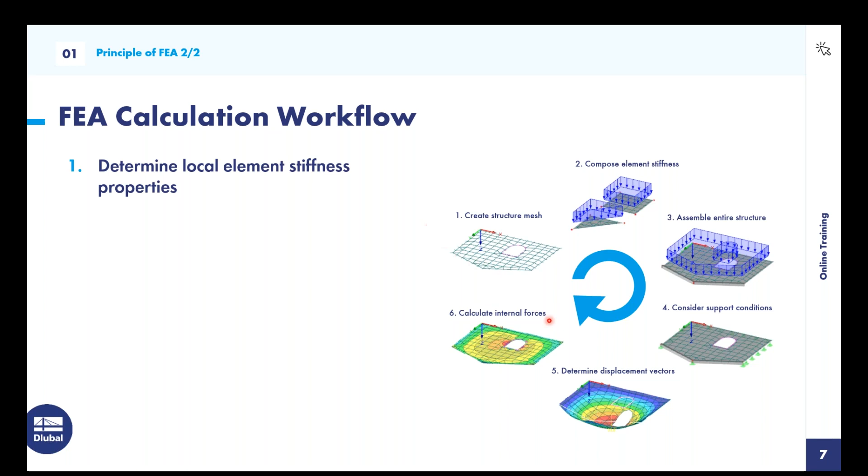Then in the second step, the program changes the stiffness properties at each node to the global coordinate system, so element stiffness is composed. Then in the third step, the composition of the entire structure takes place.

The fourth step is where boundary conditions and supports are defined. These, for example, could consist of sliding, rigid, or hinge supports.

And then the fifth step, the displacement vectors can be determined by solving the system of equations. And lastly, the support forces and internal forces can be determined just like I mentioned with the displacement method.

So now let's do an example to go over. This example, like I talked about, is going to be the continuous plate example. We're going to model this example and compare results of the bending moment with the continuous beam with our plates here. We'll go over FE mesh design, convergence behavior, FE mesh size, and result interpretation, including distribution of internal forces, shear stiffness, and result smoothing.

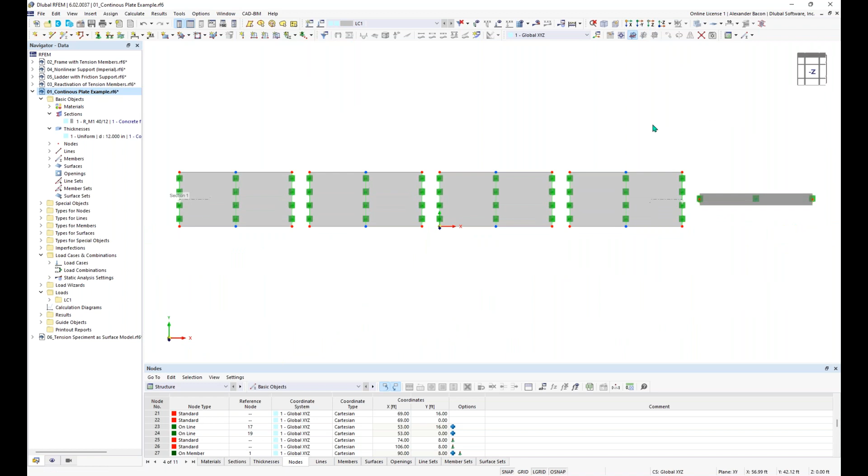You can change the view of the model in the toolbar up here using these buttons to manipulate the view. There's also a default isometric view. You can change the rendering here from wire frame model to solid model to transparent model.

Next, we have the display tab down here at the bottom. Under the display tab, you can turn on or off the graphical rendering of objects and other settings. Turning off the render of something just turns off the rendering, but it will still be considered within the calculation even though you can't see it in the work window.

The next tab is the Views tab down here in the panel. We can activate visibilities, for example, and you can see I have members and cross sections of just this type checked on. So now anything with this cross section will be shown, and anything else will disappear in the background.

You can also create user-defined views. So let's say I want this to be a view that I want to see a lot, I can click on this button and just name it something random. Now if I want to see this custom view, I can simply click on the button here, and I'll see that view pretty easily.

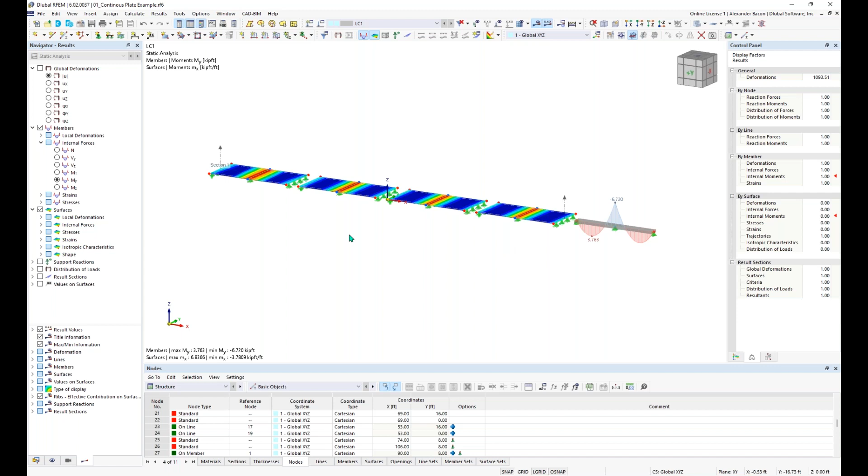One other thing I wanted to mention before we move on is highlighting. If you drag from left to right, anything within the box that's engulfed in the box will be selected. If you drag from right to left, anything touching the box will be selected. So that is how highlighting works.

And with that said, that's an overview of RFEM 6. Now we can move on to creating our continuous plate.

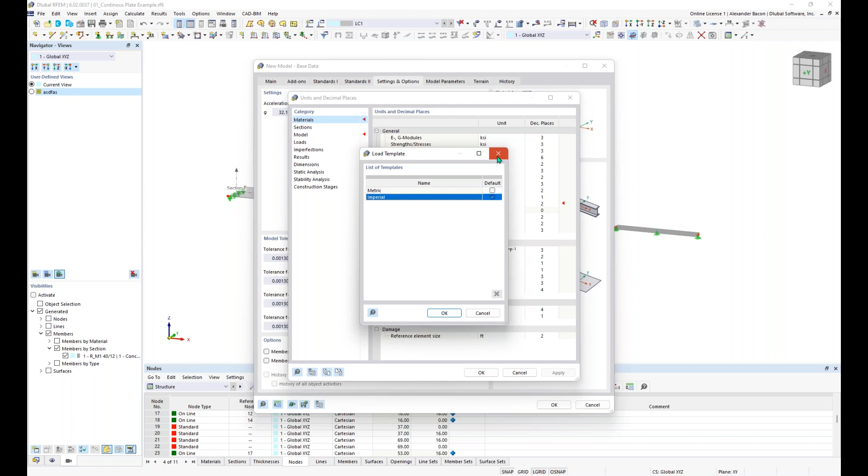Also to mention, I'm going to be using imperial units throughout this training. You can change between or switch between imperial and metric units by going down here to this button and clicking on units and decimal places. Then you can go down here to load, save template, and change the default units you have set, and change between units as well here. So like I said, I'm going to keep mine in imperial units, click OK, and then this should open up a blank model.

So now we can edit the grid points and units. First you'll see in the blank model that our grid has been created here - it's a blank grid, and we have our grid points here. Right now, by default, if I go up here to the work plane, grids/snap settings button and click on this, you can see I have mine set to a default of 50 by 50 grid points with a spacing of 1 foot by 1 foot.

What we want to do is change this to 100 grid points by 100 grid points, each in the negative and positive direction. So you can enter those in. I have also created - you can save templates.

So I saved this as a template, and we can go to load template. You can see I saved this as a template called student training, and you can set different templates as the default if you're using the same settings over and over again. So if I click OK, you can see that my template was loaded in, and I have 100 grid points by 100 grid points with a spacing of 1 foot by 1 foot.

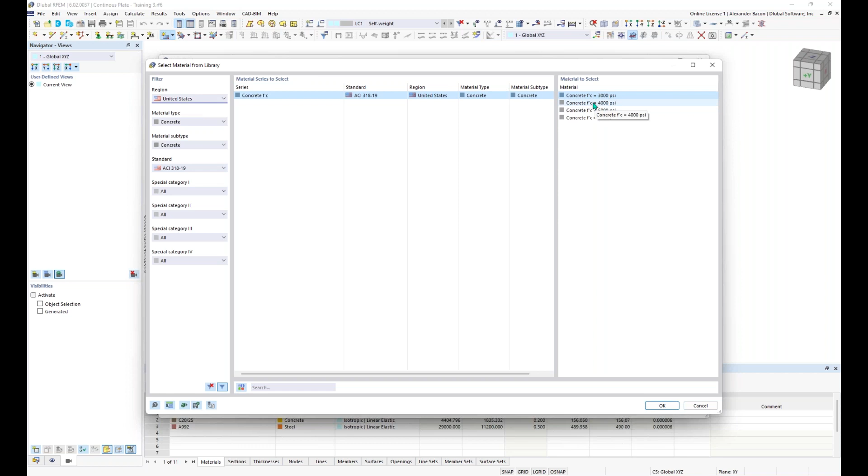So I'm going to click on this button here to import a material in from the material library. I filter to the United States, concrete, and ACI 318-19. I'm going to choose concrete with a compression strength of 4,000 psi, click OK. And now I just need to enter in a thickness, and that's going to be 12 inches.

Also, we can edit our material. So I'm going to click the edit material of the thickness button here.

And then I'm going to choose to create this or set this material to user-defined materials so that we can edit our basic material properties here on the right hand.

I'm going to change the Poisson's ratio from 0.2 to just 0, and this will allow us to get equal distribution of results across our surface. Normally you wouldn't do this, but I'm just going to do this for example purposes today, and click OK.

And now I have my material and thickness set, so I can click OK. Now you can see those are set here. So now I'm going to click OK, and you can see my cursor has changed to this reticle.

I just need to give the program 2 points on where this rectangular surface is going to be. The first point is going to be at the origin, and then the second point is going to be at 32 feet in the X direction and 16 feet in the Y direction. Click OK or left click.

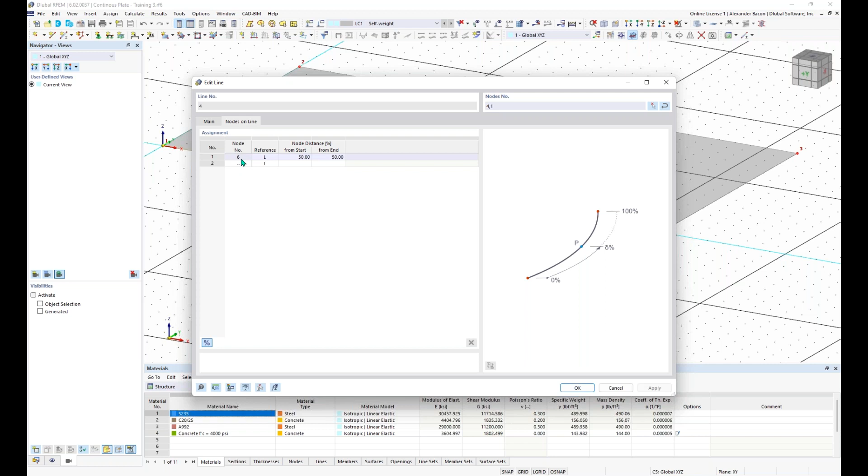So you don't have to worry about this, but in the background, that's what RFEM's doing, and that's the reason why this node here is blue, and this node here is red because it's a standard node just defining the line itself. So good thing to keep in mind.

So now what we want to do is edit this line over here. We can double click on it to edit it, and then under editing the line, we want to add some supports to this line. So we can click on support.

Under the support tab, we can go down to the drop down here and choose this default or predefined support. That's a hinge support, click on it, and then click OK. And now you can see that our line here now has our hinged line supports on it.

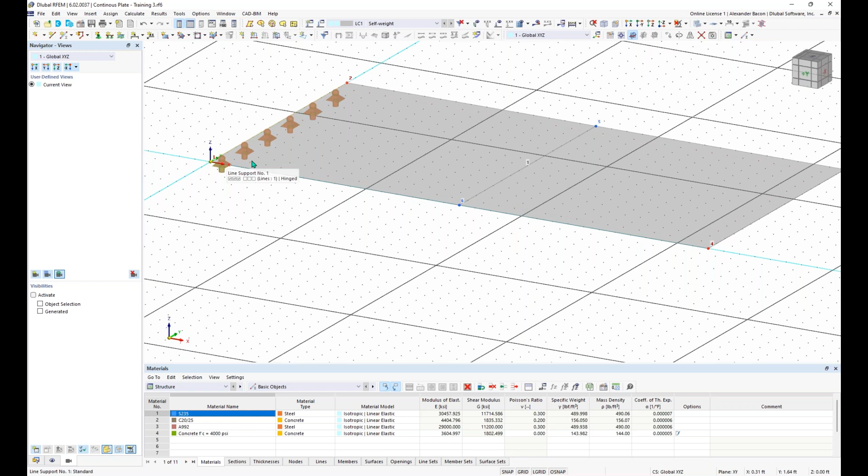So what this means is that this support will support translational degrees of freedom in each of the 3 directions, but the rotation is released for rotation about each of these axes.

So now we want to add some support to our midspan here. What we can do is highlight just our line here. We also want to add support to our other side here, so I can hold Control and also highlight that line. And then we can go up here to the toolbar and hit Assign Line Support.

Instead of just using the predefined support, we can also click on Create New Line Support. RFEM will remember the selection of the lines that we selected before going into the tool, which you can see here in the graphic.

And for this, we want to choose the sliding in the X direction, so you can see it unlocks the X translational degree of freedom and then locks the rotation about the Z axis. You can also see the symbol for the support has changed. If we click OK, and then click OK again, you'll see those supports have been added.

And you can also see, when clicking on elements, what elements they're tied to. So you can see our support is tied to line number 3, which is defined by nodes 3 and 4. So it's easy to see how objects are connected within RFEM if you need to know that.

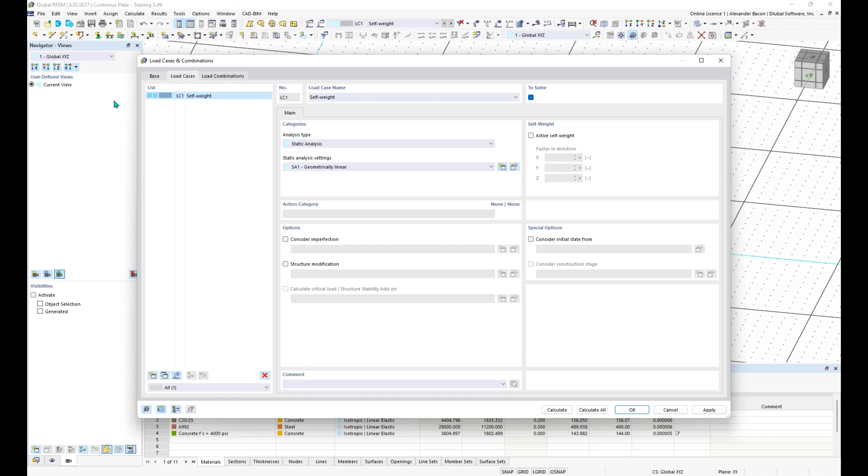You can see that we have self-weight activated for this load case. I'm just going to turn self-weight off. We only need to worry about one load case, which is good.

We're going to be adding some loading to this plate now, and every loading requires a load case to be assigned with it. So now that we have our load case created, we want to go up here to the tool new surface load.

Clicking on that, you'll see this dialog box will pop up. Here we can set our load type to force and then uniform, and we can set our load direction to global and the Z axes on true area. Then the load magnitude will be set to negative.

0.21, which is 210 pounds per square foot. We can click OK, and now all we need to do is choose our surface graphically. Now we have our load here graphically placed onto our slab.

You can also right click on this load and decrease the size of it graphically if you'd like to. So now we have our loading.

We also want to now get into FE mesh refinement. I'll keep my loading on, but we can go up here to this button and click on the dropdown and take a look at the mesh settings. Here you can see by default the mesh that will be generated is 1 foot. The finite elements are 1 foot by 1 foot. So if nothing changes, this is what we're going to generate.

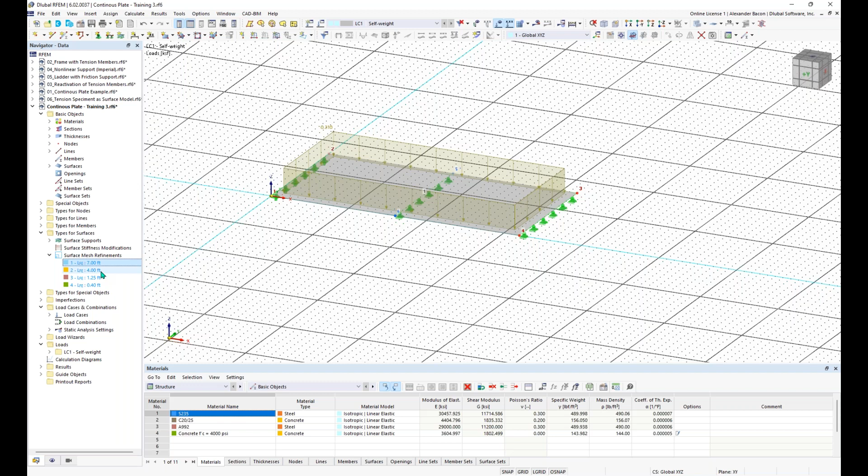So now if I click OK and expand my surface mesh refinements, we can see that we created them, but they're this light blue color because they're not assigned to any surface. We'll just leave this as is for now. What we want to do next is make some copies of our surface here.

I'm just going to highlight the whole thing with the loading and everything and go up here to the tool move/copy selected objects. I'm going to create a copy, and I want to make 3 copies in the X direction, and I want each of these copies to be displaced by a vector of 37 feet. Now with this set, I can click OK.

You can see now I have 3 copies of my plates. What I want to do is take this and just move it over so it's more centered in my grid. And now we have our 4 plates.

So now with our 4 plates, we want to create a new single member.

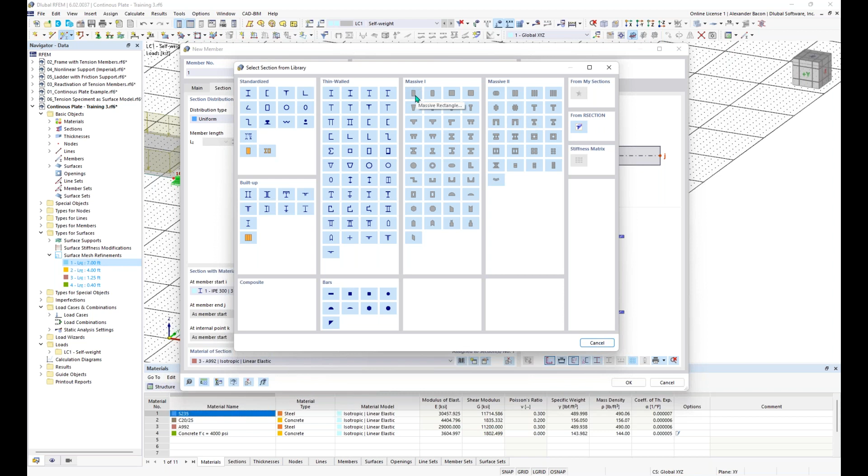Under this dialog box, we have some settings for our cross section. We want to set the material. You can see I have a couple materials already predefined here, but if you need to, you can use the material library to import new materials in. I would want to choose concrete 4000 psi, for example, just to simulate our plates.

Then under the parametric massive tab here, we would want to choose a depth of 12 inches and a base of 20 inches here. This is going to simulate the same thickness as our plates.

Then under the main tab, we can leave all of this set the same. Click OK, and now you can see our section appears here. You can also click on this button to display section details and view your section properties here if you'd like. So now with all of that defined, we can click OK.

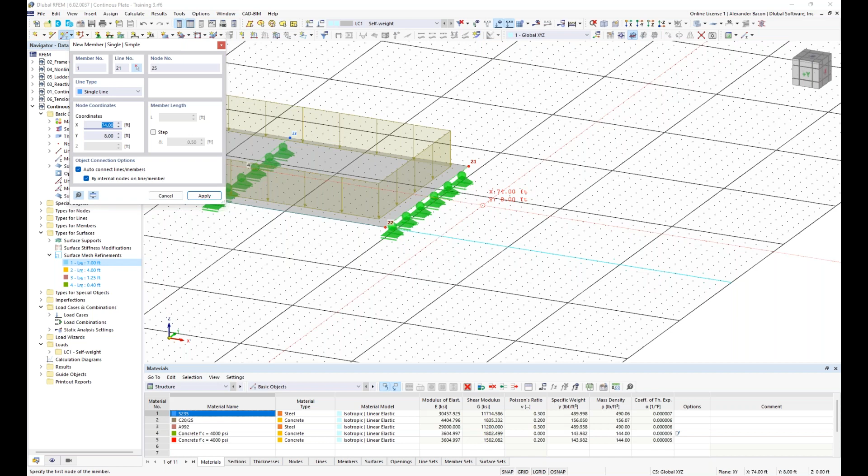Now I just want to snap to my grid points and draw this section 5 feet away from my plates. So I'm going to snap to this grid point, and then I can either just draw out the length of my section, or keep my mouse going in the direction I would like the member to go. Then on my keyboard, I can type in the distance 32 feet, which you'll see change in the dialog box on the left. If I hit enter and then right click, I can exit out of the tool, and you can see my beam here has been drawn out.

So now we need to add some supports to this beam. I'm going to turn off the showing of my grid. You can see we have some buttons down here at the bottom, and I'm going to turn off the grid here.

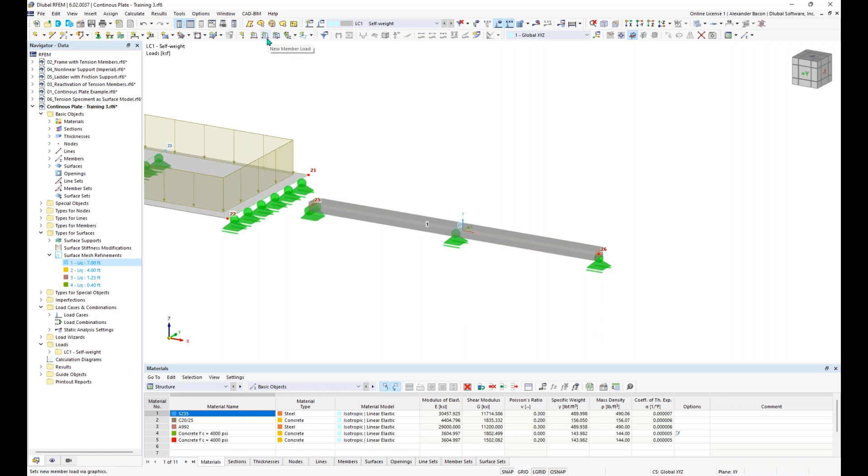Now we need to add some loading to this member. We want to use the tool new member load. There's also new line load, and a good rule of thumb is line loads are only applied to lines, like boundary lines surrounding or defining a surface, while member loads should be applied to members. So we're going to choose member load, and this load will be in the negative direction, just like the surface load, at 210 pounds per foot, or 0.21 kip per foot.

So we're going to have a force, uniform in the z direction. We click OK, graphically select our member, click OK again, and now we have our loading assigned to our member. So now all of our elements here are loaded and supported.

I can go up here to the show loads button and turn this off. Now we need to add in our surface mesh refinements, which we didn't define yet, so I'm going to do that now. We can right click on one of them and go to edit, or click on assign to surfaces graphically. I'll click that and assign my 7-foot refinement to the first surface here.

Then I'm going to right click on 4 feet and assign that to my second surface, assign the third refinement to the third surface, and then assign my fourth refinement to my fourth surface.

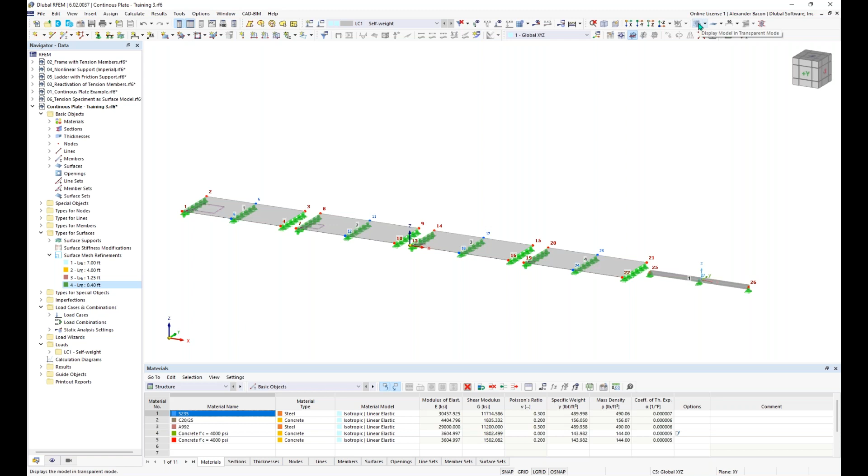Now I'm going to change the model to a wireframe view by clicking the rendering button up here, and then generate the FE mesh by going to this button, hitting the drop down, and hitting generate FE mesh. Normally this is done before the calculation is run, so you don't have to worry about it, but for example purposes I wanted to show you what the FE mesh for each of these surfaces looks like now.

Focusing on this first surface, that was our 7-foot FE mesh refinement, you can see the quality of this one is really bad, so definitely expect inaccurate results when it comes to the quality of this one.

You can see how it gets better as we move on to the second surface here, and better, and then our fourth surface here looks the best, so I would expect extremely accurate results from this one. That's what our FE mesh looks like right now for our surfaces.

Now we want to add in a results section to our surfaces, so I'm going to click on the results sections button up here. You can see here we have our results section. The main thing we need to do is tell the program what the first and second point are, the projection direction, which will be the global z direction, and then we want to show the section in the local positive z direction, which you can see what it will look like on our surface here.

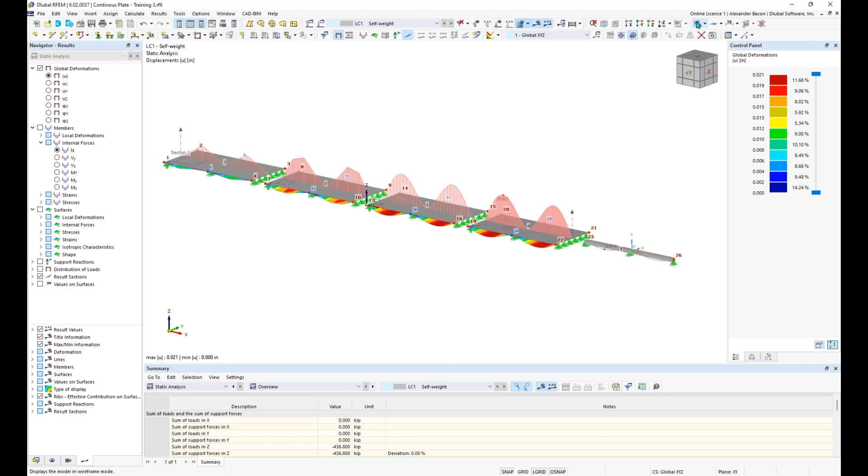So now let's calculate the results. All I need to do is go up here to calculate all results, this button here which looks like a little abacus, and then all of the results will be run. You can see right now our fourth tab here in the results has been added.

And we are now looking at the global deformations. I always recommend checking the global deformations first, because you can always tell if something is wrong with the modeling if your global deformations look strange. You can see our deformations look pretty normal, they all look good, so that's good. Nothing was modeled incorrectly — a good visible check.

I'm going to deactivate the results, our result sections, so we can turn off the result sections if we want by unchecking this box here in the navigator.

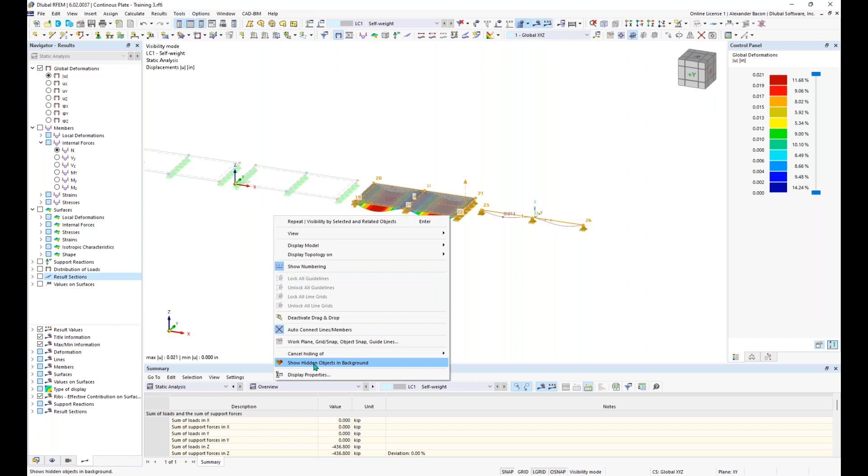We can also take a look at the internal forces. Let's highlight our last surface here and our beam, then go up to this button, hit the drop down, and choose visibility by selected objects. Any object that wasn't selected gets grayed out. I can even right click and turn off show hidden objects in the background.

Now we have an even cleaner look. We can turn on internal forces of our member here, which will turn off global deformations. Then we turn on results for members, and under internal forces, obviously we're not going to have any axial forces since we just have a beam here. So we want to look at the moments.

You can see I chose My, which is the moment about the local y-axis. If you right click on the member, you can turn on the local axis system of members and see what that looks like. So these are the moments about our local y-axis - I'm not sure if I said x, I meant y.

We can also take a look at the results on our surface. What I'm about to show you is pretty important. To see the results on the surface as well, that's a little different - we can just check on the box for surfaces here.

Then under internal forces, similar to the member, we go down to internal forces. If we wanted to compare results between the two, we'd want to turn on or show the moments along the x-axis. These are the moments in the surface along the x-axis, and this is comparable to the moments about the y-axis for the member. That's how we can look at the internal forces.

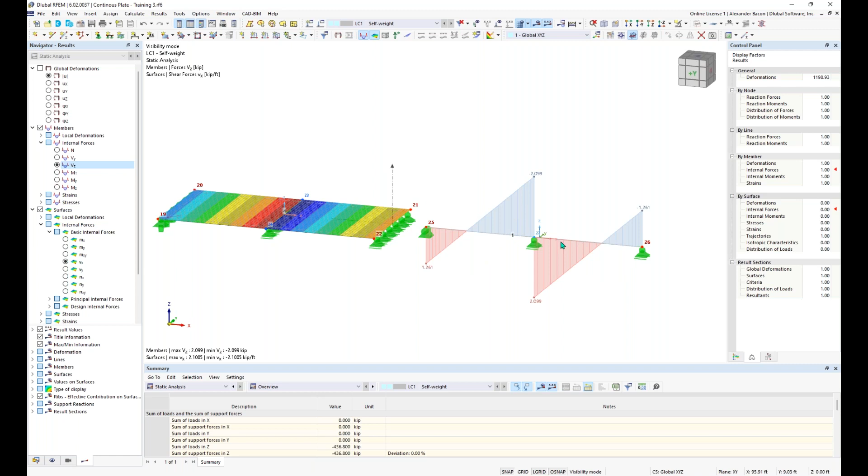And then we could turn on the shear VZ, which is in the local Z direction for the shear of our member here. That's how we could compare the two.

Now let's clear our results, clear our visibility. I'm going to go up here to this button and cancel this visibility mode, and that'll bring back the rest of our surfaces.

Now what we want to do is activate the results sections. Let me zoom out here. We want to turn on our results sections again, and now you can see a better comparison between those two. We also want to turn on the local extremes for our results sections, which is under the values, under the results sections down here.

This separate panel down here is for changing how the results look graphically. If we go into results sections, I could turn on local extremes here, and now we can see the values of the local extremes of each of our elements.

Now if we take a closer look at something like bending moments, we can see how the results compare between the beam here and our plate here. Obviously the surfaces should match the beam, and this shows how important it is to make sure your FE mesh is fine enough, because you can see the superfine FE mesh here is the closest comparison.

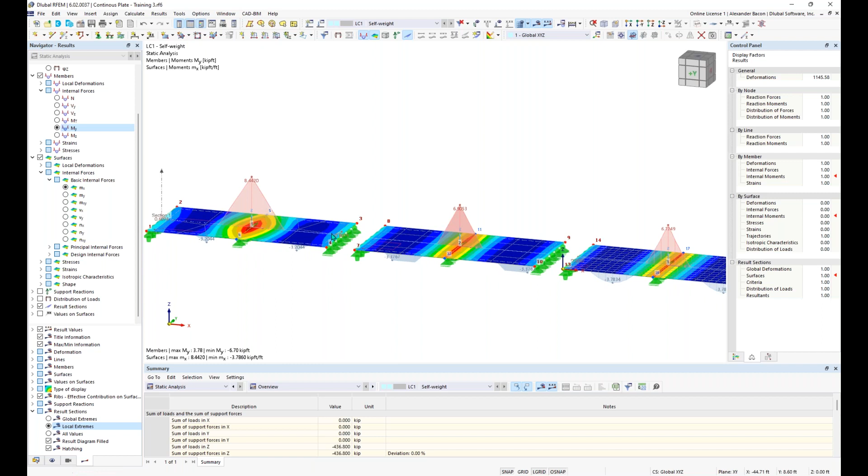So our maximum moment is 6.70 and 6.70. As we move down the line here and our FE mesh gets worse, our results start to stray further and further from our control of the beam. The finer the mesh gets, results are only being calculated at each FE mesh point or node on the surface, so the finer the mesh, the more points of data we have, and the more accurate results.

Keep in mind though, if your mesh is too fine, your calculation time will increase. So you want your mesh as fine as necessary, but as coarse as possible. I would recommend something like the third example here. A good rule of thumb is to have at least 4 FE mesh blocks between any given span or boundary, so this second surface here would be the minimum of what I'd recommend.

Next we can take a look at the result diagram of our section cut here, which is pretty interesting. We can get a better view of our result diagram starting from surface 1 all the way to surface 4. It's interesting to see how we have very little data points for the first surface, which looks very inaccurate, and how this gets smoother as our FE mesh starts to increase and looks a lot better.

Hi, Alex. Yeah, we just have one question. Okay. Can you show us how to create a user-defined material?

Okay, yeah, that's a good question. I can switch back to RFEM to show this. If you want to create a user-defined material, you can go to the data tab under the navigator, and then you can see here we have our materials, which are the ones we pulled from the material database. I can right click on the materials here and click on new material. Instead of importing a material from the material library, we can choose the option user-defined material, and then you can just enter in your material properties manually.

In RFEM, we can now talk about shear stiffness. When it comes to hand calculations, if you're trying to match the results of the beam here, you have to take into account shear stiffness effects. This is what RFEM does in the program, and it leads to increased deformations due to shear forces. This is not taken into consideration with hand calculations, where you assume a beam like this has infinite shear stiffness.

This plays a major role when it comes to a material like concrete as well. This is taken into account by default in RFEM, and you can deactivate it so your hand calculations match. If I wanted to deactivate shear stiffness for this beam, I could double click and edit the beam, then go under the section tab, edit the section, and under the options for the section, you can deactivate the shear stiffness. Checking that on, I'm going to click OK.

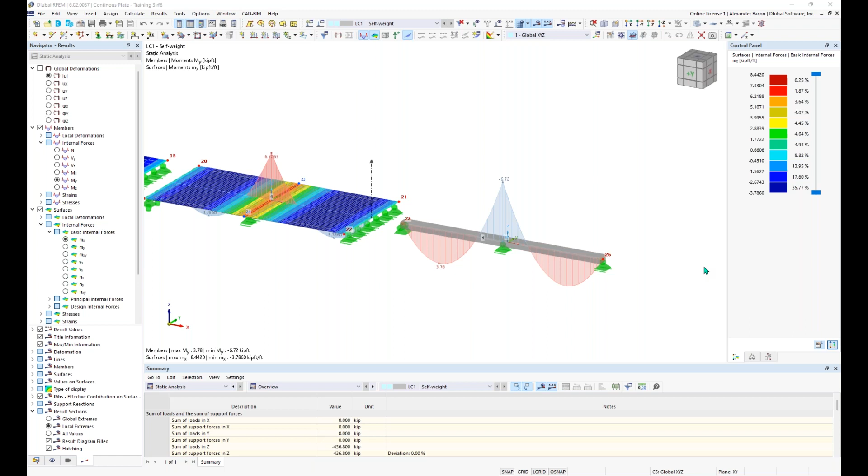Now I'd just like to give another test and see what everyone thinks. So this next test is going to come up now. I'm going to launch that and give you guys a little bit of time to answer it.

All right, so let's take a look at the results. The statement is: the FE mesh size should be. The first option is as fine as necessary and as coarse as possible, then as coarse as necessary and as fine as possible, and the last option is as precise as possible and as coarse as necessary.

This is a little bit of a brain teaser, but the first option is correct: as fine as necessary and as coarse as possible. The reason is you want it as fine as necessary, you don't want your mesh super small, because that'll increase your calculation time. So you want it as coarse as possible, so your calculation time isn't as long, but as fine as necessary so the results are accurate. So the first option was correct. I'm going to hide that.

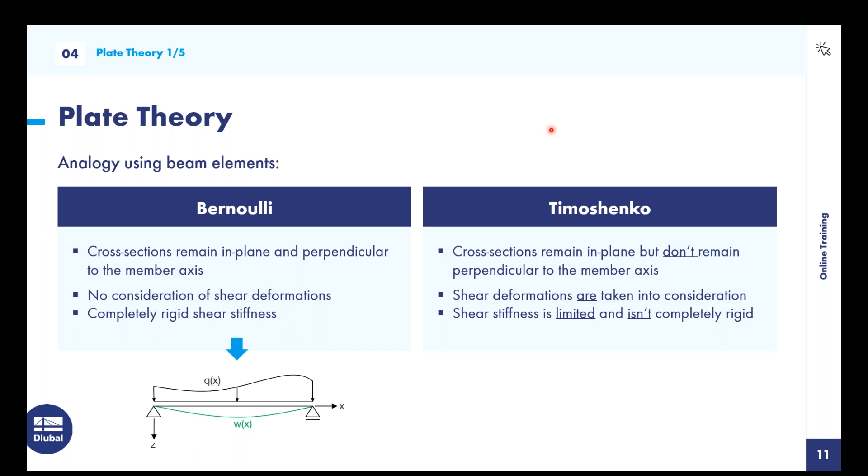And then the second theory is the Timoshenko theory. The assumptions with this one is that the cross sections remain in plane, but they don't remain perpendicular to the member axes. This means that shear deformations are taken into consideration and the shear stiffness is limited and isn't completely rigid. So the Timoshenko theory takes into consideration shear deformations where the Bernoulli's theory does not.

Now, how do these compare to the equivalents of the two plate theories for plate elements? Bernoulli's can be comparable to the Kirchhoff plate theory, and the assumptions for the Kirchhoff plate theory are that we assume we're going to be using a geometrically linear analysis, so small deformations. We're going to be using a linear elastic material basing off of Hooke's law. The cross-section remains flat, there's no warping, there's constant thickness, and there is no consideration of shear deformations.

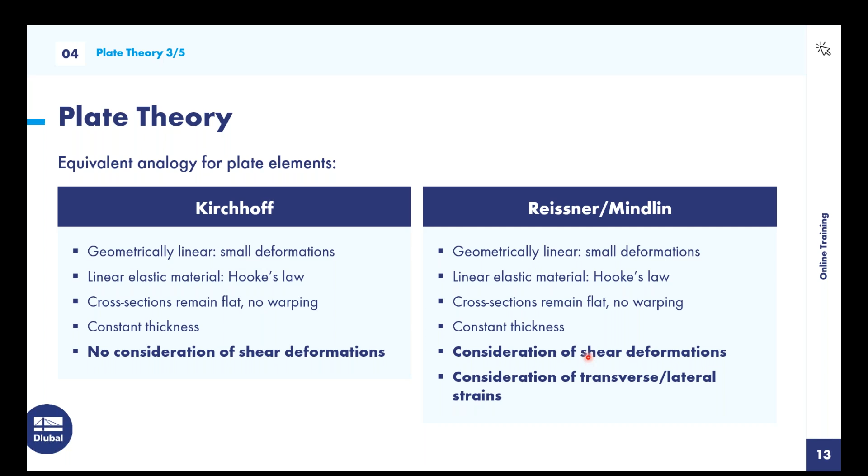Just to summarize, the Kirchhoff theory, when used with very thin plates, gives great results. This theory does not consider shear deformations. You also have to keep in mind that this only considers pure bending and load bearing capacity, and this is a very simplified approach.

Whereas with the Reissner-Mindlin theory, this theory is great for the use of thick and thin plates, and the reason for this is because we do consider shear deformations, and you have to take into consideration that the shear influence component is relatively high. If you're neglecting shear forces, you're going to have a significant error. This is a high value approach and increases the accuracy of your shear forces. So in my opinion, the Reissner-Mindlin theory is what you should be using all the time, but it's just good to know the difference between these two theories.

Now to relate this back to RFEM, we can look and see where these settings to choose between these two theories are located. We want to go under the navigator and under the data panel here, then under the static analysis settings, and go under the settings that we're using. So we'll edit the static analysis settings.

You can see we're using the geometrically linear analysis, which is for our load cases, and all load cases are calculated using a geometrically linear calculation by default. Then under the basic settings, you can see here we can change our bending theory from Mindlin to Kirchhoff if we want, and click OK. We should see a difference in our results.

So you can see now our results match more closely to our beam here. This is because both of these are now not taking into consideration shear deformations. Now we would have a bigger delta in our results if we were using a thicker plate, such as a foundation plate, and the shear forces and deformations are going to be changed as well.

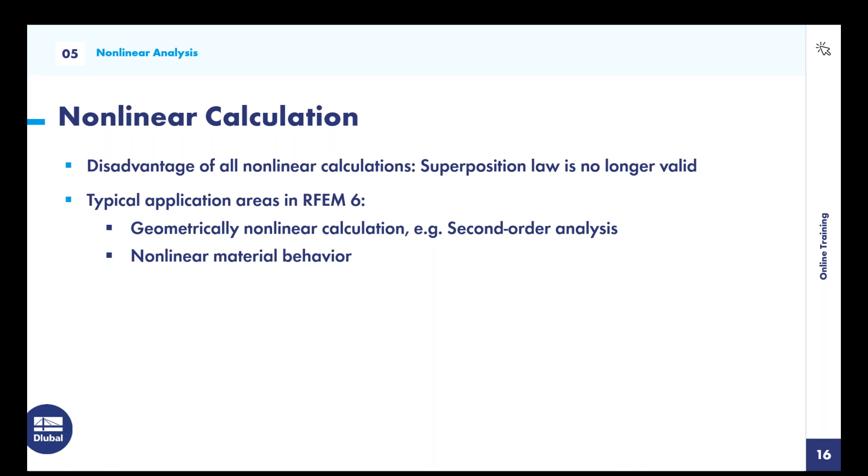We also have nonlinear behaviors for structural objects like members, hinges, and supports, for example. I'll be showing examples of all three of these areas in RFEM 6 after this. Also keep in mind that these types of calculations increase accuracy, so that's an advantage, but another disadvantage is that the calculation time can also increase when adding nonlinearities.

So now let's go back to RFEM and go through some examples. I'm going to open a previously modeled model by going up here to the Open Model button. I have set up a frame with tension-only members, which I'm about to show you now.

Actually, I have this opened already. So if I open this up, here is a frame, and this frame is set up with tension-only members bracing it. These members are lateral bracing in the X direction. We're also just assuming this frame has been taken from another structure, so imagine the top here is framing into a roof, and these supports are just supporting it in plane and out of plane. So this wall would need bracing in the global X direction, and that's what our X bracing here is. You can see this X bracing, if I double click on it, is set to truss, so tension only.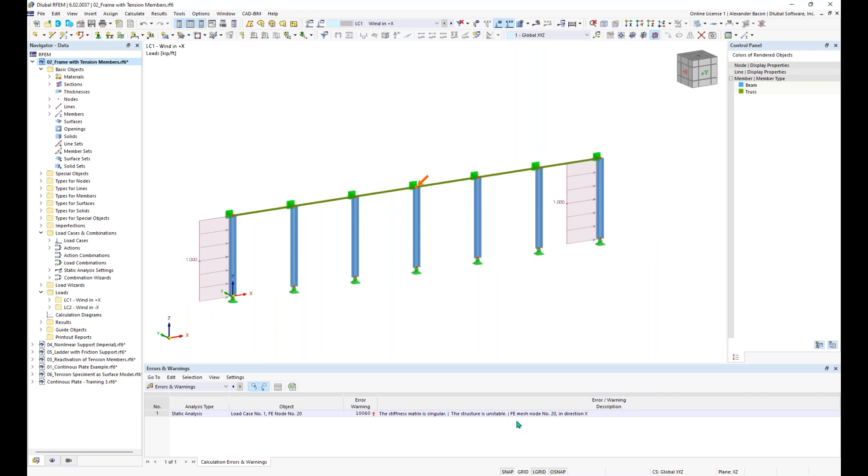And what the program is doing is checking the stiffness matrix. And if there is a singularity, then that means the structure is unstable. You can see this says the structure is unstable here in this error because we have no bracing in the X direction. This whole thing is able to just fall over.

So what we need to do is stabilize it by adding bracing. I'm going to show you how to add bracing back in.

I'm going to go up to new member, and under new member here I'm going to choose the member type truss. It says only axial forces, so this truss member can only take axial forces. It cannot transfer shear or bending moments.

So what we want to do then is also check on the nonlinearity option here. You'll see this nonlinearity tab will pop up, and I want to create a new nonlinearity.

And set this to failure if compression. So what this will do is mean that if this member takes any compression loads, then the member will fail. We're assuming these are cable-like elements and can't take compression. You can also see we have other types here, such as slippage, failure if tension, and some other options. So we'll click OK.

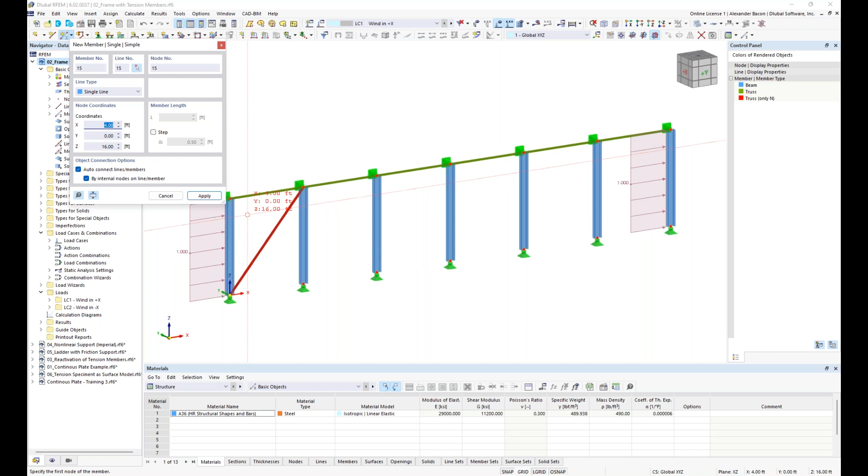I also just realized I forgot to change the cross section. That's fine, we're just going to continue drawing these. Oops, not sure what happened there.

All right, just restart the program real quick. Sorry about that. That was strange. So sometimes you might get, it can happen every once in a while, but the program might force close.

And I'm just going to, there we go. The good thing is that if you forget to save, the program automatically keeps backups of all your models. So I'm just going to go through and restore these real quick. Shouldn't take too much longer, we can get right back into it.

Okay, there we go. All right, so back to drawing the section here. I'm going to delete this one, and we're going to create a new member, set this to truss only, nonlinearity, failure if compression, section. So I forgot to choose the section last time. We're going to change this to round, 0.75 inch diameter, click OK.

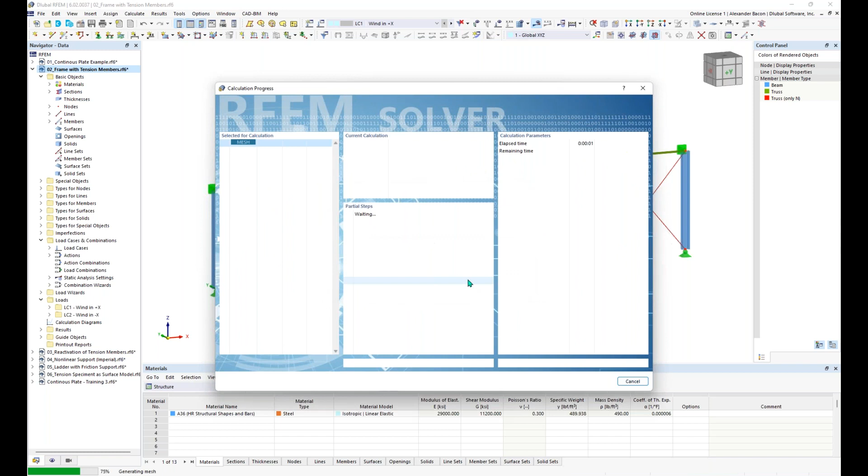And so now we have our tension-only truss members here. Now if we run our results, we get no error. If we take a look at our global deformations here, you can see that only our X bracing member in tension is giving us results, whereas our tension-only members here have received compression forces and have been deactivated, so they're no longer in the calculation. We're adding stiffness to the structure.

If we turn on members and turn on our internal forces and look at our axial forces, you can see only the members that have tension forces are showing results, whereas our members that have compression in them have failed and are not showing axial forces.

So now we can move on to the next example. This model, if you are opening these models with me, is called reactivation of tension members, model number 3. For this example, I'm going to show you that sometimes a structure cannot handle the loading applied to it, even if it's stiff enough. It could be stiff enough, but it may not be able to handle the loading, and it might be unstable.

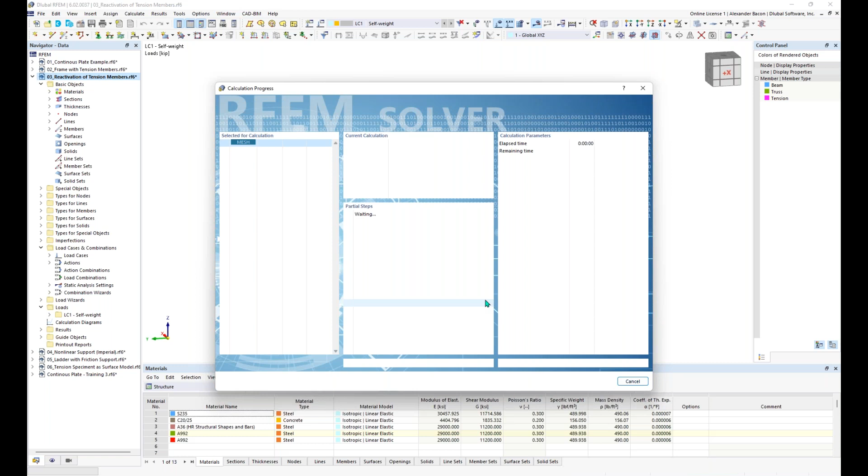You'll see when we run our results, you would expect this structure to be fine and totally stable. But the reason it's failing is because when these compression forces activate, they shorten the columns here, which causes our tension-only members to take on compression in the first iteration, and so then the structure fails.

And so this is the reason why we're getting instability for this structure, because once this X bracing fails, the whole frame here is unstable in the Y direction, which you can see down in the warning that the structure is unstable in the Y direction and the stiffness matrix is singular.

So how can we avoid this? You would think the structure should be fine. Well, there is a setting for this. If we go under the static analysis settings, or we can just go up here and edit our load case, you can see we're running this load case according to a second order analysis. If we click edit here, we can edit the settings for the second order analysis. You'll see, since we have nonlinear elements, we have this tab here called reactivation.

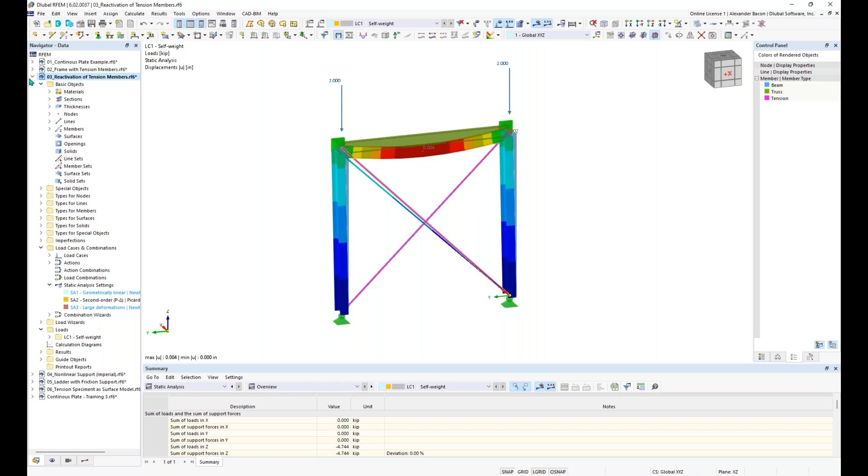So the next example we can move on to is the nonlinear support example here, model number 4. In this example, I'm going to show you how you can assign nonlinear supports to a structure. On the left-hand side here, we have a cantilever with a rigid support at the bottom and a green nodal support. The cantilever on the right-hand side has a blue nodal support. Whenever you see an element that's blue like this, when usually it's green, that means it's a nonlinear component.

So I can edit this nodal support to show you the nonlinear option that's activated. I can double click on it and then click edit nodal support. You can see here that in the translational X direction, we've chosen this nonlinear option here, which is failure if negative Px. That means if this node experiences a negative force on it, then it will fail.

So we can see that if we click OK again, and I turn on my loading, you can see that I added the same loads here to each side. And if I run the results, click OK, we should see that the deformations should be shown.

Sorry about that. Program does not seem to want to cooperate with me today, which is very strange. Usually this all runs pretty smoothly. So while I'm restoring these, should be pretty quick. Again, sorry about that. Strange.

All right, so let's go back to our nonlinear support and try running our results again. Okay, so this is what I was trying to show.

Once our results have run, you can see that I can show my support reactions here, turning on support reactions under the result navigator. And if I turn this into a wireframe view, you can see that our deformation on the right-hand side, this support has fully failed because it's experiencing negative forces in the x direction.

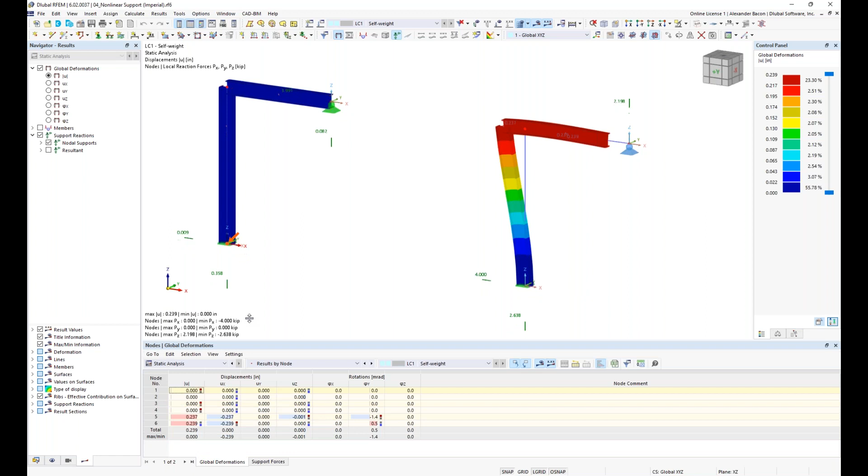And you can see that if I go down here to static analysis and results by node in the table, under support forces, our node over here, node number 3, is experiencing negative support forces, and our node on the right hand side has no negative support forces, because it's totally failed, and the cantilever is now pushed into the x direction where this support is supporting the cantilever at the top here, so the deformation is not into the x direction.

So yeah, that's how you can take into consideration nonlinearities for supports. We can move on to the next example, and this one is called ladder with friction support.

With this example, you can see I have a ladder that I modeled here, and I created about 16 load cases so that each load case has a point load on each rung of the ladder. Turning on my loads here, I can use these arrows next to the drop down to go through, and you can see that each rung of the ladder has a point load of 1 kilonewton applied to it.

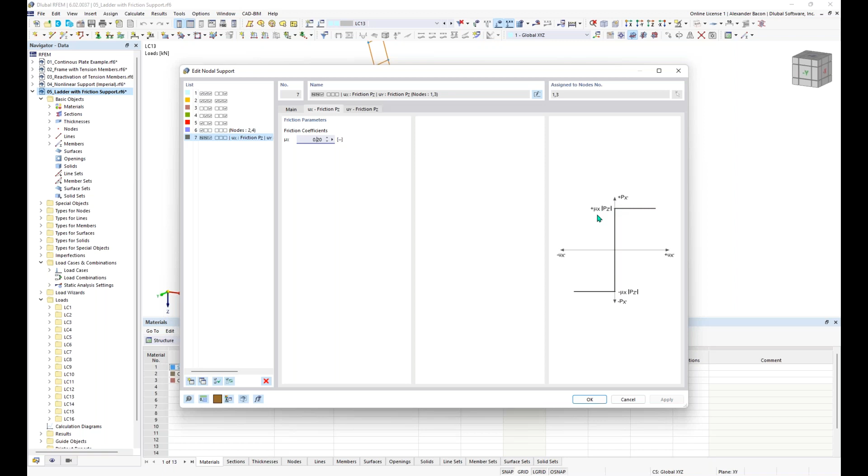So for ux, we can enter in a friction coefficient, mu x, here, which is 0.2. This means that this support will fail if the force of 0.2 times the vertical force PZ is exceeded.

You can see that here in the graph. So if I click OK, and we just go to our load case 1 here and run the results, and I click yes. You can see that the bottom here, these supports are fully activated, and this is the deformation we would expect from our ladder with our supports fully activated. These supports at the top are just acting as the wall that the ladder would be resting on.

You can also see I have my support reactions turned on here. So we're getting vertical reactions of 0.5 kilonewtons from our 1 kilonewton of loading.

And then as we go up the ladder, we want to see at which point the supports will fail. So you can see as we go up the ladder that once the loading gets to about this height here, we're at 0.08 kilonewtons.

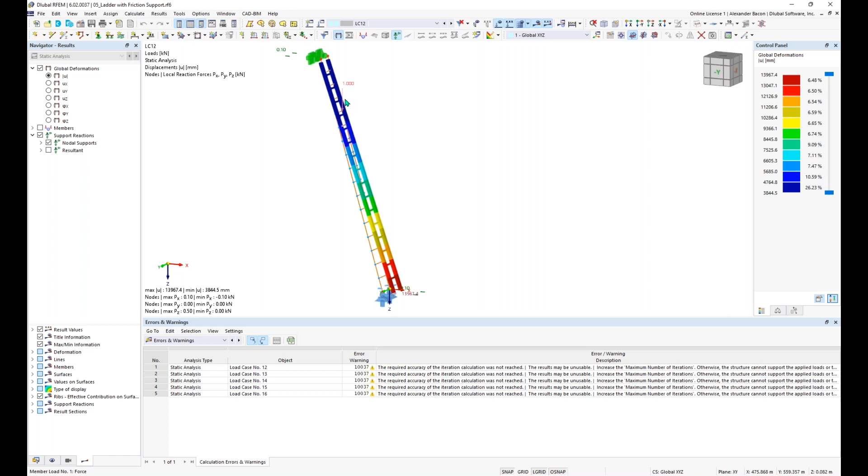So let's keep going, and then there is where you'll see that once this loading gets up to this height here, our supports, or our x direction forces, reach 0.1, and so our supports fail and then our ladder gives out here. So that's how you can use nonlinear supports for friction supports.

And so now we can move on to the next example. The next example model is called tension specimen as surface model. With this example, we have a specimen here of some sort, similar to something you'd see in one of your labs. This specimen is made out of steel.

So we're just going to go over the general concept of plastic analysis. The elastic deformation in a structural component, like I talked about earlier, is due to a load and is based on Hooke's law. Hooke's law explains that the stress and strain relationship in most materials is linear, and most materials are a linear elastic material.

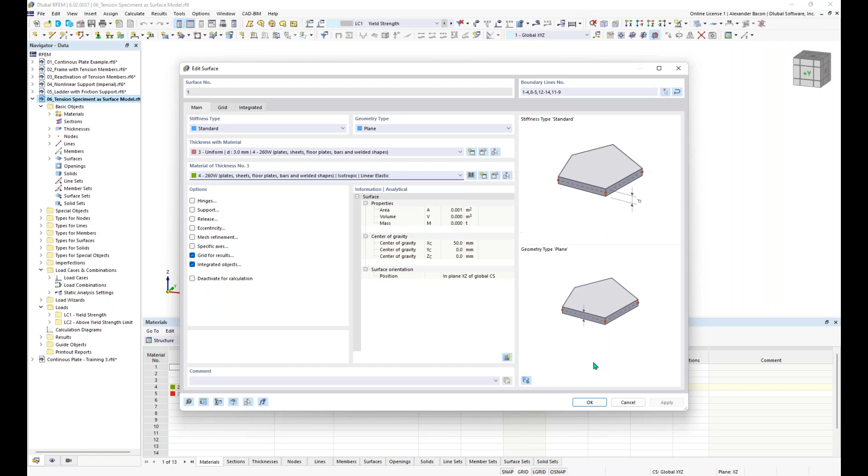So let's click OK, and now let's run the calculation on this surface just using a linear material model. If I double click on this surface here, you can see I have two materials that I've already pre-made. The first one is a linear elastic material, and we're going to choose this one. You can also see I have a plastic, or nonlinear plastic, material that I've created, but we're just going to take a look at the linear elastic one first.

I've also added in some loading here, so I'm just going to run the results so we can take a look at them. And here you can see the results.

And so we can see the deformation here, but we can also take a look at the surface results and the stresses on the surface by going to surfaces, stresses, and then under equivalent stresses and under von Mises stresses, we can take a look at the von Mises stresses on the surface.

This is a kind of stress hypothesis that is known most commonly to be used for stress design of steel sections or surfaces. This test example has a yield strength of 260 newtons per square millimeter. So if I edit this material and go to the material values, you can see down here the yield stress of this steel is 260 newtons per square millimeter.

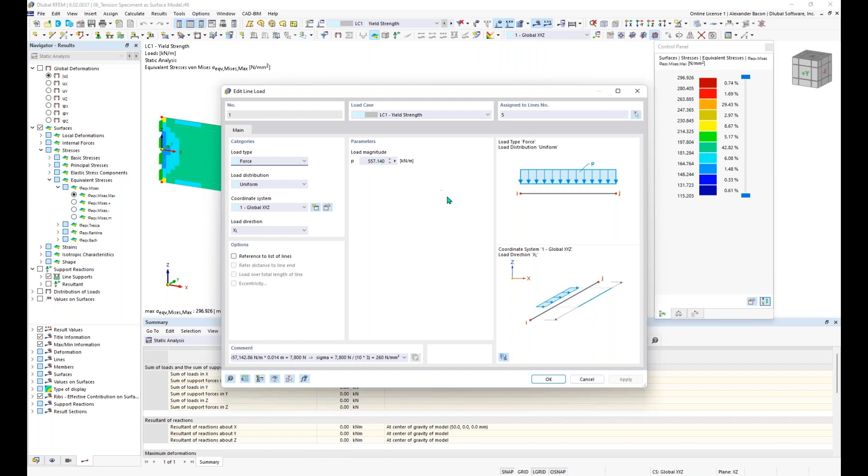And so then we can take that tensile force and turn it into a line load by dividing it by the length of this line here, which is 14 millimeters. Converting that, we get a value of 557.14 kilonewtons per meter. And so that's the maximum amount of tensile force that this specimen should be able to take.

So to see better results as well, we want to make sure that our results are set correctly, that our result smoothing is set correctly. So if we go to calculate here, we have some settings called result smoothing.

And when you're looking at results like this... sorry, one second.

Sorry about that. When you're looking at results like this, you want to make sure that the option here, constant on elements, is set. So what this does is it shows the average value from the surrounding FE mesh points, so there's no interpolation from the surrounding elements, which is usually set by default as continuous within surface. To get the most accurate results, you want to make sure constant on elements is set when you're looking at stresses on a small surface like this.

And so now we can see areas of the element here, like I said, which are higher than 260 newtons per square millimeter. And we can double click on our color scale here and set limits.

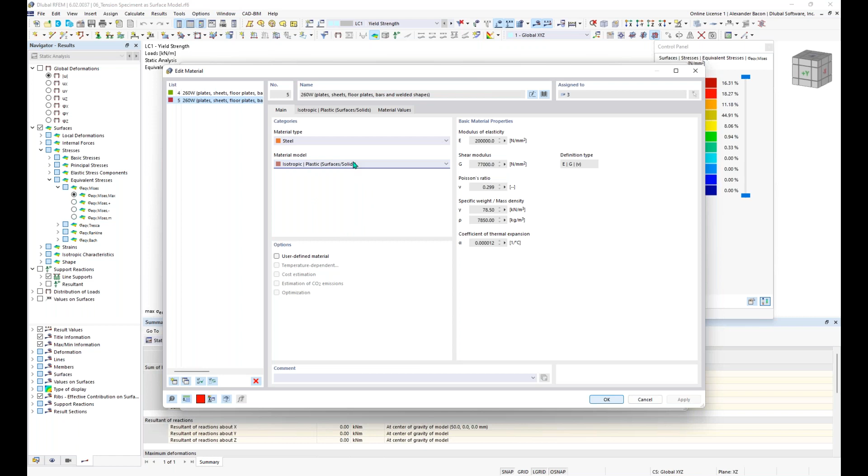So we have linear elastic, plastic for members, plastic for surfaces, and then a list of other nonlinear material models that you can choose from. We're using the isotropic plastics for surfaces and solids. Choosing this will activate the tab up here, isotropic plastic for surfaces/solids.

And so then under here, you can adjust the yield strength for tension and compression individually. And you can set up here what hypothesis you want to view, or what the stress failure should be according to. We want to keep this set to the von Mises hypothesis for looking at those types of stresses.

And so now we can click OK and click OK again. And our material changed, so we have to rerun our calculation.

So now you can see that if I set this color scale back, if we're looking at our surface stresses or von Mises stresses, we're not getting anything higher than 260 newtons per square millimeter. So this is in reality what you would see.

You can see now that the material here is yielding, and we can look at criteria. We can turn on the criteria here, and this shows us exactly where the material is yielding and going past the point where it can handle the stresses.

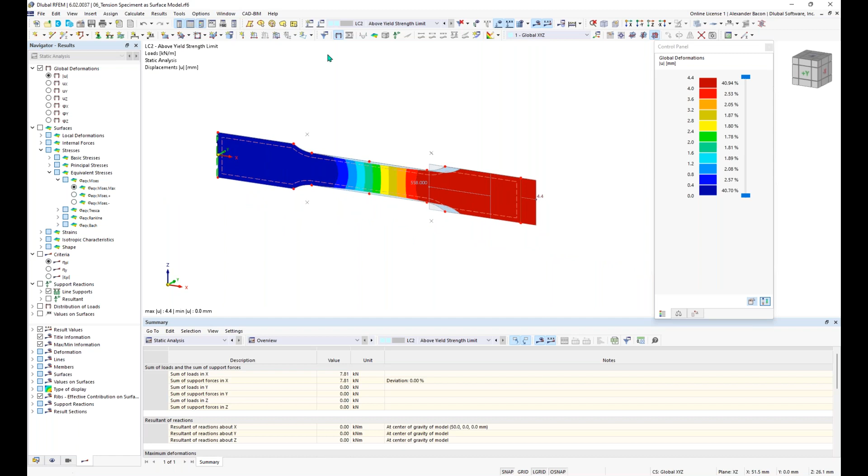If we change this to load case 2, where we've gone past the limit of what the material should be able to handle, you can see now we're at 4.4 millimeters and the material has yielded. You can see that in the neck of the test specimen that it's thinning out. We can also get a nice animation of what that looks like.

So that's how you can utilize plastic materials and nonlinear effects in RFEM 6. This is very similar to what you should see in a lab experiment.

Our last two examples are going to be on singularities. So I'm going to go back to the PowerPoint, and we are going to... okay, sorry about that.

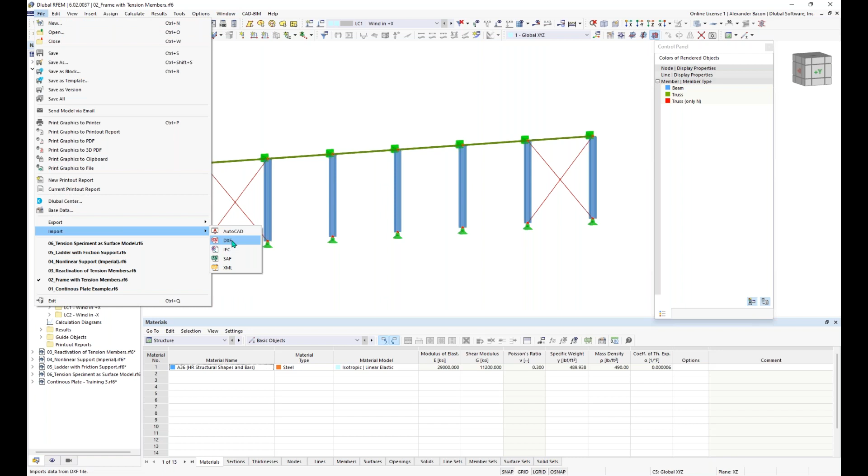Yeah, so just real quick, you can import and export back and forth between AutoCAD - we do have direct integration with AutoCAD. What you can do is go to File, then Import, and choose this option here, AutoCAD. I don't have AutoCAD running right now, but if you did, a dialog box would pop up. You can only import and export lines between AutoCAD, and you can also have information with these lines, such as cross sections and materials. So when you're importing and exporting between AutoCAD, things like surfaces and solids cannot be imported and exported between the two, but we do have that option. You can also use the DXF file type as another way to communicate between AutoCAD and RFEM.

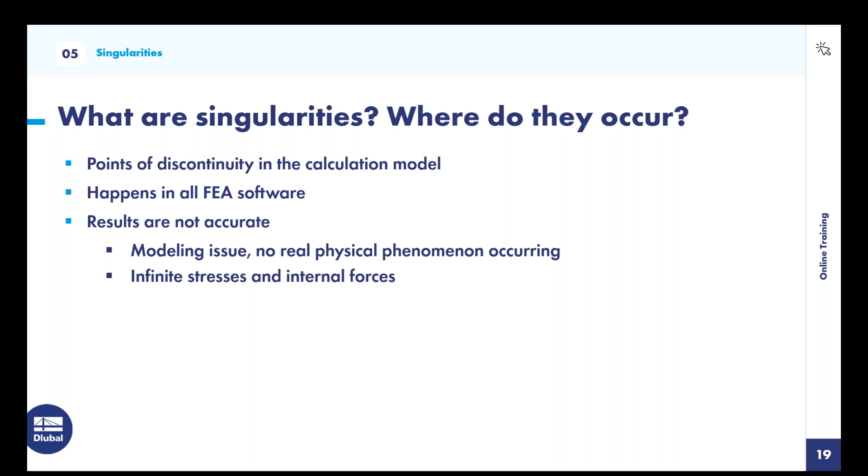Singularities can show themselves as infinite stresses or internal forces. With singularities, things like mesh refinement do not improve the result. Mesh refinement just only gives you a better idea of where singularities can occur.

Singularities occur in FEA software when the loading or forces are all applied to only one single finite element node. So the typical singularity locations are usually point and line loads and supports. And the solution to this would be something that I will show you on how to avoid these in the next RFEM example. They can also occur at openings and re-entrant corners.

And to solve this issue would be to add in some rounded corners instead. They can also occur at stiffness changes due to changing in material or thickness, or drastic changes in material or thickness. The solution to this would be to possibly space out smaller changes in thicknesses using something like steps. So now let's go back to RFEM and model an example to show this.

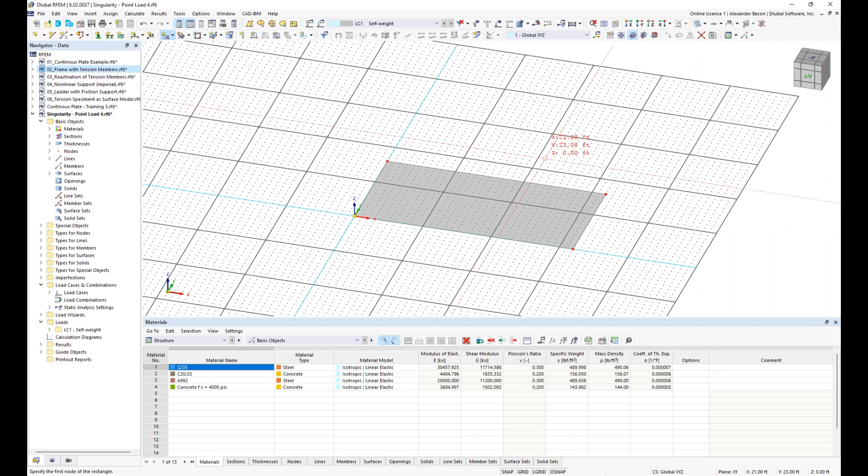And then I'm going to draw my rectangular surface here and make it 32 feet by 16 feet. Right click to exit out of that tool. And now we have our rectangular surface created.

So the next thing I want to do is add a node to the center of my rectangular surface here. So I'm going to go up here to node in between two nodes. And what this would allow me to do is to choose two nodes here, and it'll place a node in the center once I click apply, which you can see there. And I can exit out of that. Now I have a node placed at the center of my surface here.

And what I want to do is add a new nodal load to that node. This nodal load is going to have a force magnitude of -10 kips. It's going to be applied as a force in the z direction. So I'm going to click OK, choose that node, and click OK again. Now I have a load of -10 kips applied to the center there.

And now we have our surface loaded, we need to support it. So I'm going to just support the boundary lines of this surface. I'm going to go up here to assign line support and just choose the hinged predefinition support here. Click OK. And then I can simply just highlight the entire surface here, and that will add in my line supports to my boundary lines.

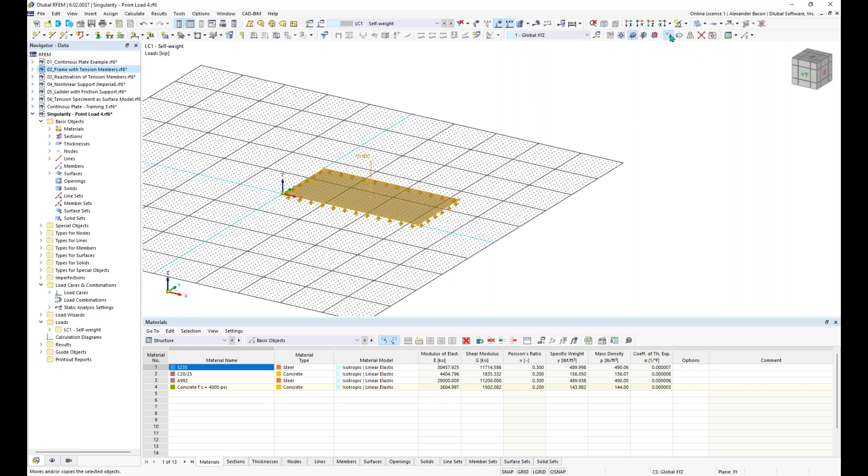So then I want to make a copy of this. I'm going to highlight everything and use the move/copy tool and create a copy. I want to create 3 copies. These are going to be displaced in the x direction, 37 feet, like so. And so now that we have our copies made,

we can then create our 4 mesh refinements like we've done before. So we can go under types for surfaces, surface mesh refinements, right click on that and click on new surface mesh refinement. And then our first mesh refinement here is going to be 7 feet, and we're just going to make 3 copies of that.

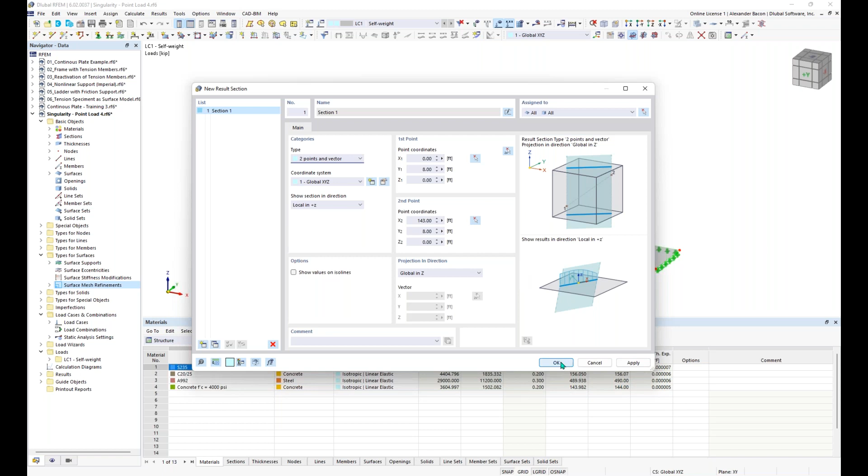We also want to add in a results section similar to last time. So I'm going to create a results section using 2 points. This dialog box will pop up for results sections. You can just click on this button here, select 2 points in graphics, and type here 2 points and vector. That vector is in the global z direction and the local z direction, positive z direction. We'll click OK, and now we have our section cut there for our results.

And we also have our LC1 that was created here. If I edit that, we can turn off self-weight for our load case there. Then we can simply hit calculate and run our calculation.

So now we have our results sections activated, which you can see here. What I want to do is under results sections, turn on local extremes. And so now you can see we have our local extremes for our deformations turned on. We can also shrink the size of our loading there, or our load, and turn this off. Right now we're looking at our global deformations, which they look okay. Doing a quick visible check here, and this is what you would expect from our global deformations.

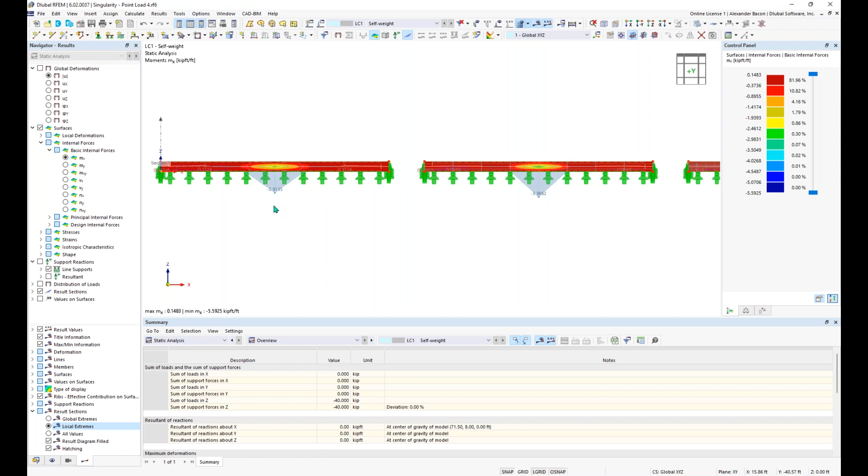Let's take a look at our internal forces. So if we go to internal forces and we take a look at our bending moments along the x-axis here, this is where things start to get a little tricky, because you can see our surface on the left here is showing a maximum moment of negative 2.91 kip feet per foot, and then our last surface here is showing a very different number of negative 5.5. We know that the finer the FE mesh, the better - the finer FE mesh here is better than the coarse FE mesh. But the question is, which moment is the right moment here between these surfaces?

And the answer is that none of them are correct. None of these surfaces are showing the correct moment that we would expect to see in reality. This is because of singularity, and so the results aren't useful here - we can't use these results. It doesn't matter what the size of the FE mesh is, because we have a singularity occurring, which you can see if I zoom in here. This is what you would see from a singularity.

And the reason we're getting a singularity is because we applied a nodal load, a single point load, which is just feeding into one single FE mesh point. So the solution to this would be to take this one single point here and distribute the nodal load over the surface instead of into a single load. So what we want to do is create a surface load - we're going to take this load and divide it by a random surface area. I'm just going to take this load and delete it, and we're going to take this 10 kips and divide it by 2 square feet.

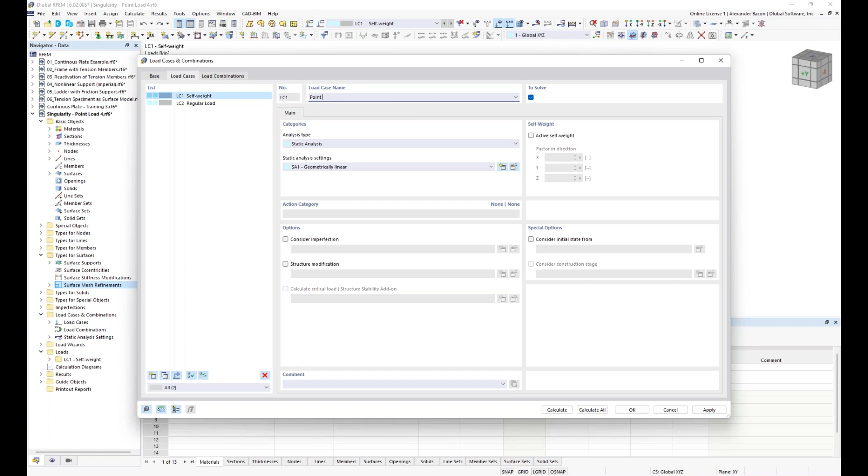To apply this new surface load, we want to create a new load case, and this is going to be a regular load. Let me undo this - yeah, so we want to create a new load case. This one's going to be called regular load; this one was our point load. Click OK. So now this regular load, we're going to use the tool under this tool here.

I'm going to hit the drop down next to new free rectangular load. So under here, we're going to go to new free rectangular load and choose that.

First we're going to choose load distribution as uniform. This is going to have a magnitude of negative 5 KSF. We want to choose the load location as center and sides of rectangle, and this rectangle, or the size of this rectangle, is going to be equal to 2 square feet - so that's 1.41 for each side. And our load is going to act on the XY plane and in the global Z direction.

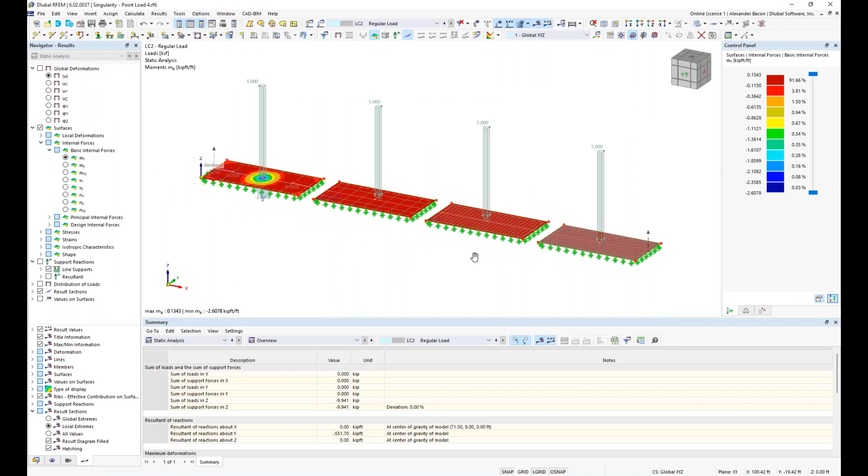And so now let's run our calculation. Now we should see, actually, so I made a mistake. We're not seeing results on these surfaces because we need to set assign to surfaces to all.

So double clicking on one of these loads and just changing it. Actually, sorry about that. We want to highlight all of these loads here and double click on them, and we need to make sure this assigned surface here is changed to all. So it looks like we can't do that for multiple loads, just want to do that for one load each time.

And we want to do that for the last two here. And that is the reason why we weren't seeing any results there. So let's try running our results again.

And so now we're seeing more consistent moments between each of our surfaces here, and that's because we don't have any singularities on every surface, showing we have more similar moments. This is one way to fix singularities: having the loading distributed over multiple FE mesh nodes instead of just feeding into one singular node. And we can compare this again to the singularity that we actually had in the first load case.

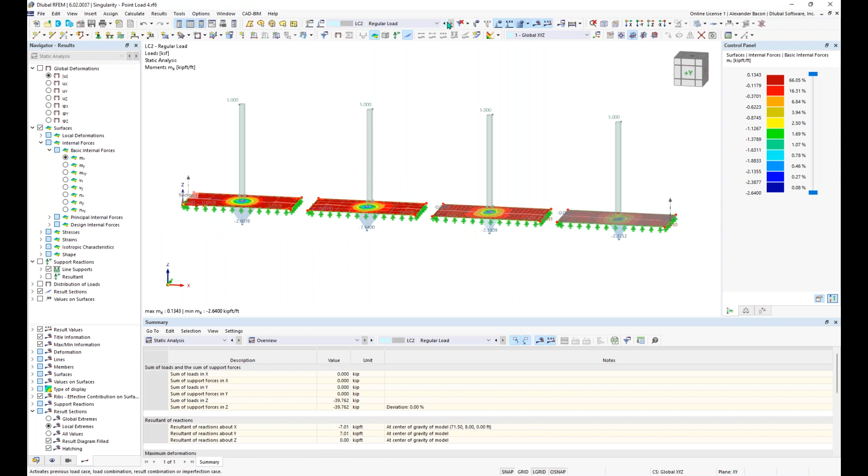So now we can also, if this occurs, instead of doing this to fix the singularity, we could look at our result diagram for the section cut we have here. So if I right click on the section cut and go to result diagrams, you can see here our singularity.

And what we can do is use a tool called result smoothing. So I can click on this button, edit smooth ranges. The tool is called smooth ranges. We can use this tool to add in a smooth range, which averages out the results.

So let's say, for example, we want this smooth range to occur right on the last surface where the singularity occurs, which is 111.295 feet, and it ends at 112.705, and this is the size of, you'll see 1.41 feet, which is the size of our column that we're pretending is connecting into this element. And so we'll click OK.

And now you can see we have this smooth range up here. You can see we have the averaged out results down here at the bottom. So you can move this range around, and yeah, you can use this to smooth out the singularity here.

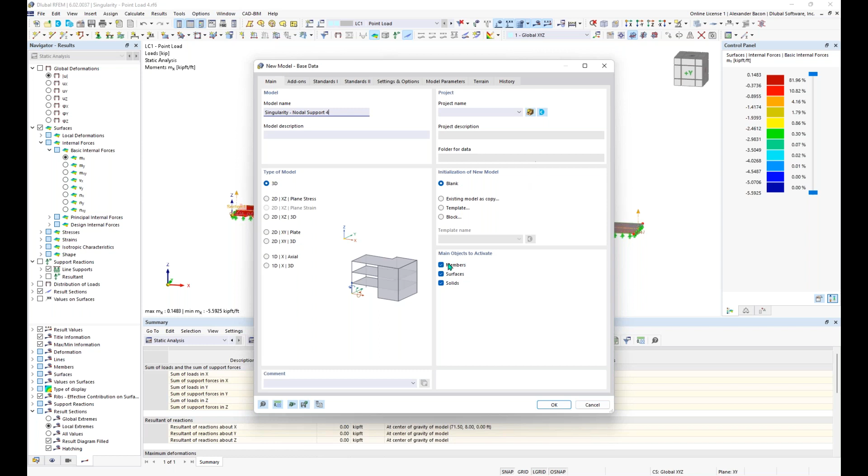Under the add-ons tab again, I'm going to deactivate the load wizard and combination wizard, as we're not going to be automatically generating load combinations for this model. So we'll click OK.

And now again, similar to the other model, we want to just create our 4 surfaces again. So I'm going to go up here to new rectangular surface, and you can see some of my previous thicknesses have carried over, but I'm going to create a new thickness again by clicking on this button. And then for the material, I'm just going to choose concrete 4000 PSI.

Something else to mention in the material library is if you're not located in the United States, we also have a long list of other countries and standards you can choose from. So always good to know, but that's how the filter works on the left-hand side here. So again, we'll choose 4000 PSI, click OK, and then enter in a thickness of 12 inches again.

And then we can go and proceed with drawing the plate here, which will be 32 feet by 16 feet.

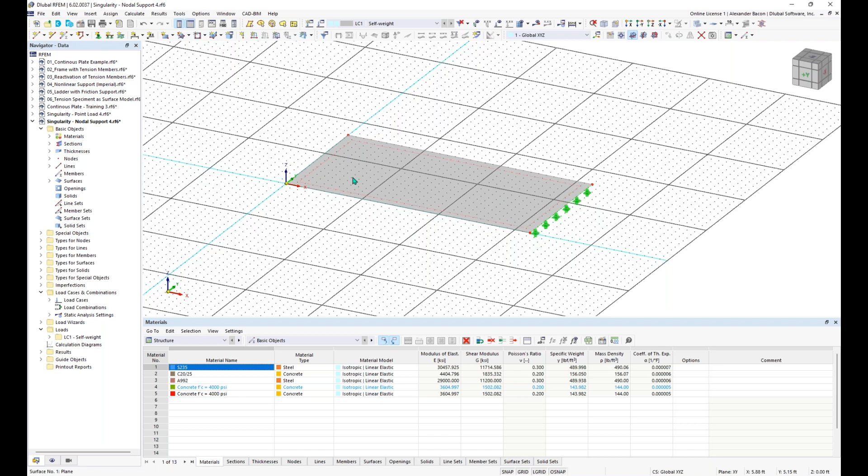And then I'm just going to create a new standard node, and place this pretty much anywhere in this region, like so. Now we have a node integrated into our surface here automatically. And I'm going to assign a nodal support to this node, just a normal hinged nodal support like so.

And then I'm going to add in a surface load. So I'm going to create a new surface load, and this is going to be just another load, 210 pounds per square foot. I'm going to click OK and apply that graphically like so. And again, we can shrink this load.

And also we want to edit our load case here, and again turn off self-weight. For our load case, we don't want to take into consideration self-weight.

And we also, again, want to create some surface mesh refinements just to see the difference. So we'll create a new surface mesh refinement. This first one again is going to be 7 feet, and then 4 feet, and then 1.25 feet, and then 0.4 feet.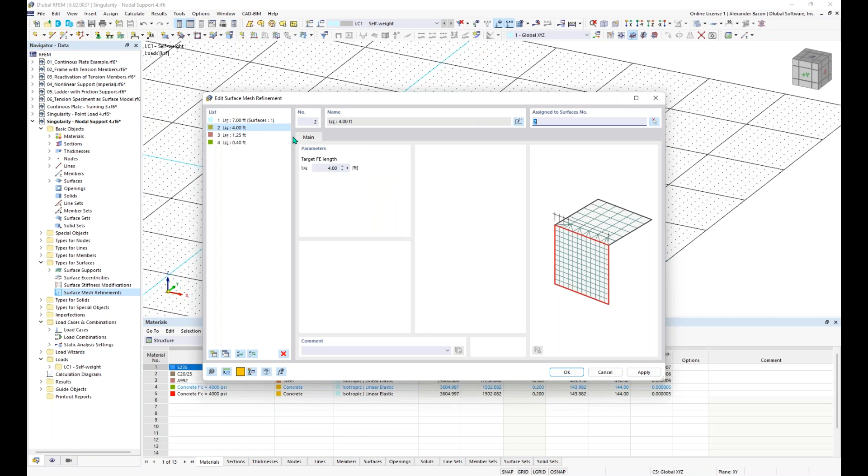And then we can add and assign our surfaces. So 1, 2... oh wait, oops, we didn't create our copy. So I'm going to click OK. And we need to create a copy of our surface here. Forgot to make our copy.

So highlight that and go up here to the move/copy tool. Click on that. We want to create a copy, create 3 copies. These are going to be displaced 37 feet, again in the X direction. Click OK.

Now we have our copy there, and we want to then just assign our mesh refinements graphically by right-clicking on them, selecting the desired surface. So we'll assign those graphically, and once we have those assigned like so...

We can add in our new section result by choosing 2 points graphically. So we'll choose our 2 points again, click OK, and now that we have our section cut here...

And we have our loading applied, we can run our calculation. So once we run our calculation, I can turn the loading off and the results sections off, and we can see what our deformations look like. So they look pretty good, that's what I would expect from this setup we have here.

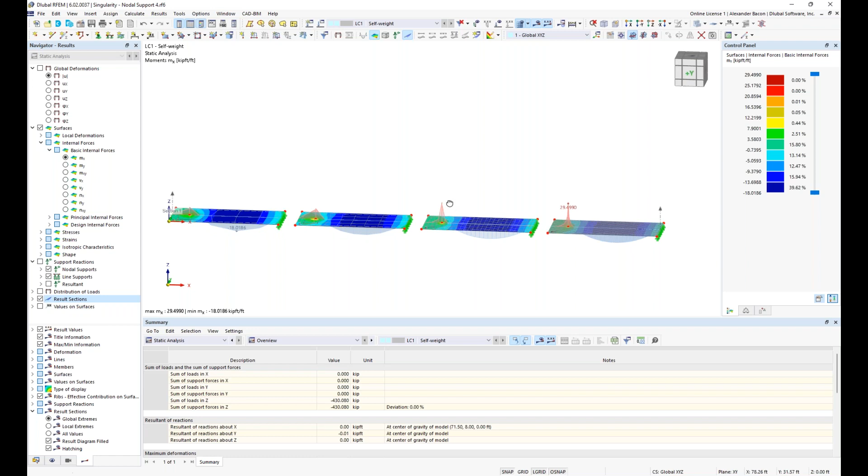But what we want to see is the singularities at these nodal supports. So all of the loading right now, if we check on surface results, and then we check on MX, and we turn on our results sections, all of the loading that's applied to the surfaces here has all been fed into the single nodal support.

So if I turn on local extremes, you can see that at that single nodal support, all of the loading is being fed into there. And we are getting super high moments at those locations because that nodal support is just sitting on one single FE element.

So that's what the singularity looks like for something like a nodal support just feeding into one FE mesh node, and something you really need to look out for. So these are not results you can rely on, and the correct result out of all of these surfaces is none of them. None of these are correct, and it doesn't matter what your FE mesh looks like.

But like I mentioned before in the PowerPoint, having a finer FE mesh doesn't fix singularities, but it does, as you can see, give you a better idea of where that singularity is exactly located. As with this, you have no real clue where that singularity is happening, you just have a better idea with this finer mesh here.

So the solution to this problem is, like I mentioned before, you could use the smooth ranges to solve this issue. If we right click on the section here, you could add in a smooth range and smooth out the results to get a better idea of what the results should be there. That range would be the length of whatever element is connecting into the surface here at this node's supposed to be representing.

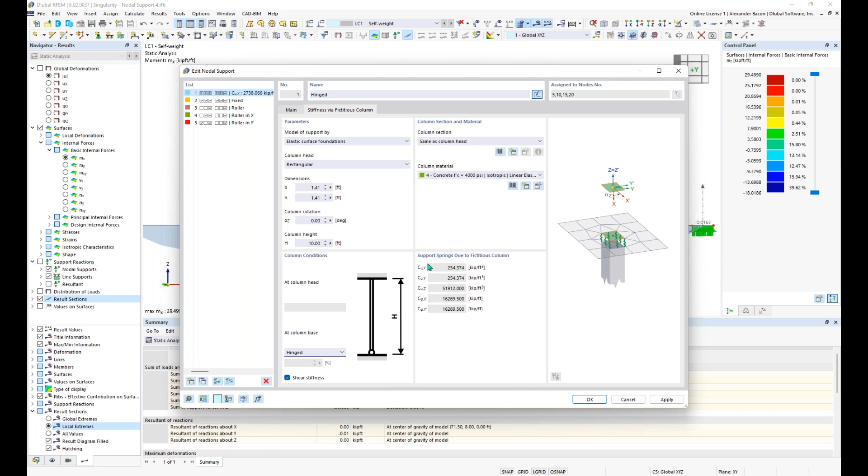So once we enter in this information, we're also assuming the base of the column is hinged, the boundary condition here. What this all does is feeds into a calculation, and RFEM will calculate for you what the spring constants are for this column. And it will take these spring constants and apply them to all of our degrees of freedom for us.

So now this nodal support that we have applied, which you can see in the graphic here, at each of our surfaces is now a spring, which you can see denoted by this symbol here. So if we click OK, click yes, click OK again, now you can see that each node here is a spring, and these nodes are no longer fully rigid.

So what we can do now is run our calculation again. And so now we can look at our global deformation. Not much has changed there, probably just the amount of deformation. But looking at our surface results, we can see that we now have more consistent results. They're a little different from each plate, but now they're more consistent.

And to even increase these results more at these locations, there's not only just surface refinements that you can add, but you can also add FE mesh node refinements to each node here. So if you want to add those, you can right click on the node and go under assignment and click on nodal mesh refinements assignment. And we can click on new nodal mesh refinement. You can see this graphic here showing you what this refinement is going to look like on the node.

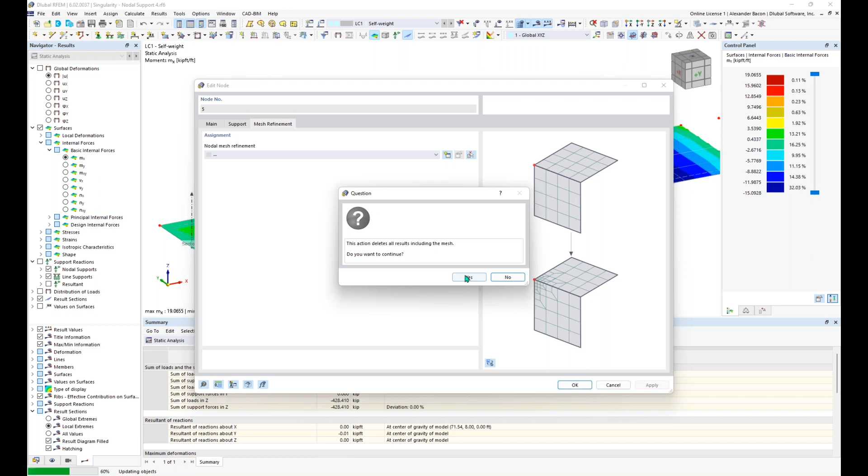And so once we click OK, yes, and click OK again. Now it might be a little hard for you to see, but there is this sphere looking symbol telling me that there's an FE mesh node refinement at this node here.

And what I can do is hold Control and drag to copy this refinement to each of my nodes, holding Control, left clicking and dragging.

Now when I run the results, you can see what the FE mesh looks like. So now that we have that at each surface, the FE mesh is the same for each surface here.

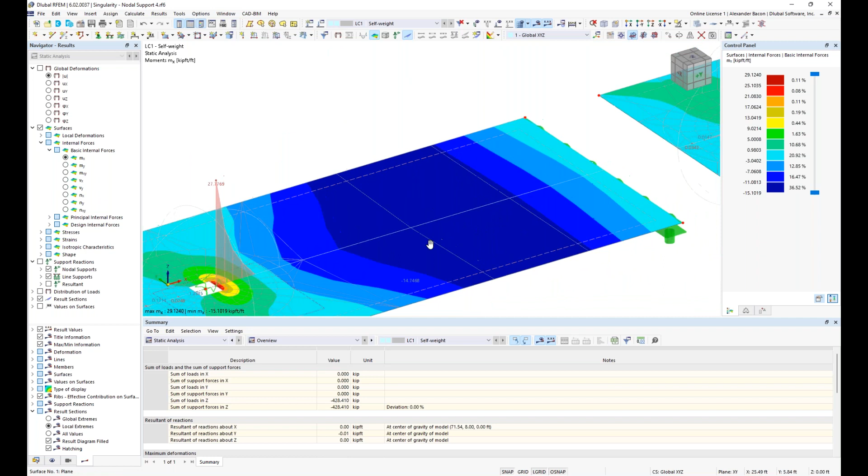And even though the opening here resembles what the column would look like on the surface from our fictitious column that we added with this node, you can still see that we have somewhat of a singularity occurring at this location near the column edge. This is another point where you'd want to take note of where the singularity is occurring and take this into consideration when doing design work on a surface and seeing something like this. So it's important to notice things like this.

So that's the end of my singularity examples there. And now I'd like to give another test, so I'm going to open that up now and launch it. If you guys could answer this test, then we can move on and go over it.

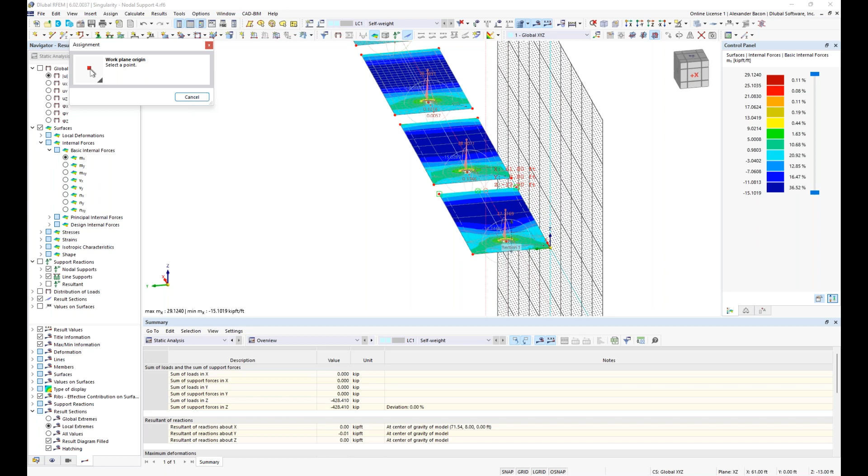So whenever you have a corner, let's say, of a wall feeding into a surface. Let's say, for example, I want to change my work plane here to there, and move it over a little bit like that. You can change your work plane using these buttons up here, and change the origin of the grid work plane using this button. Let's say I have a wall that I just drew in here that's supporting this surface like this.

So whenever you have a wall feeding into another surface, or like a slab resting or bearing onto a wall like this, let's just get rid of this nodal support. We have a load applied to here. Actually this would probably be better if I just took this and placed it. Yeah, all right, let's take this.

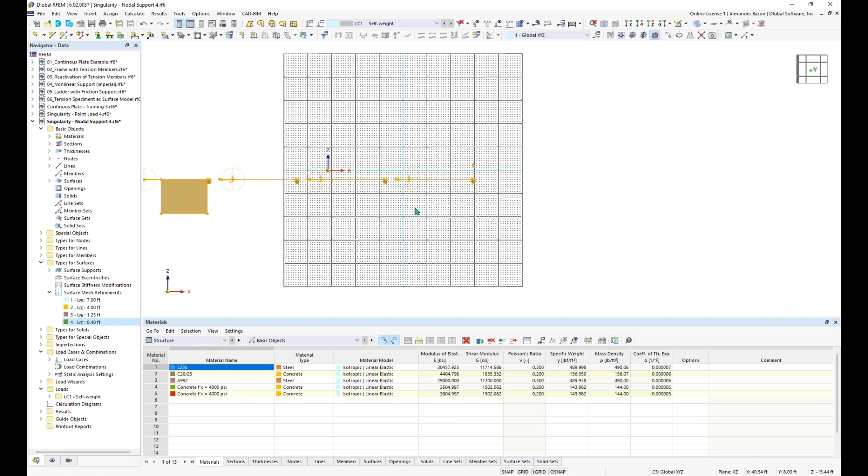Just move it over like so. And I just changed my grid origin here like that. And let's just redraw that wall on this, like that. So if we had a wall bearing down, or a slab bearing down on a wall like this, let's see what it looks like.

So this is basically what I mean when, oh, we don't have it supported. I'll delete this. We need to add in a line support like that to this wall. Let's try that again.

So yeah, when that question talks about corners of walls, you can see right here where this corner of this wall feeds into this surface is where another singularity can occur, at this point here. So when I talk about corners of walls, you want to watch out for this, and what you can do is add an FE mesh refinement like this to help, but it would also help to just make the corner of this wall rounded a little bit, so it's not just one single point feeding into an FE mesh node like that.

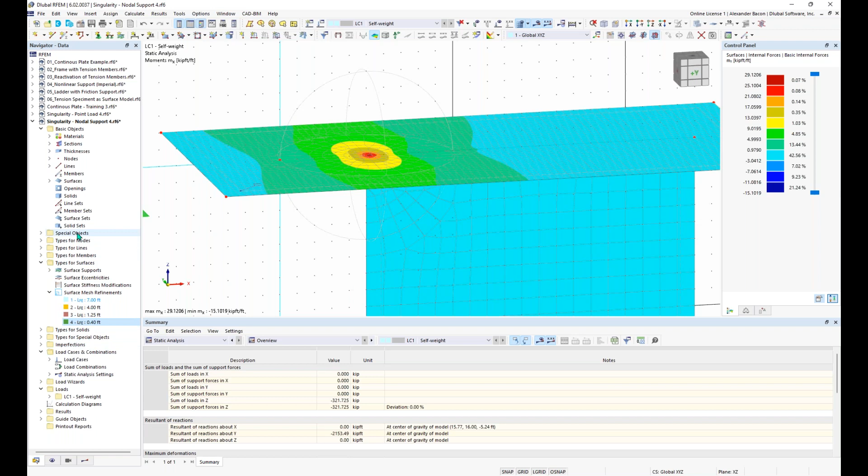And then also we have smoothing regions that you can apply to your surfaces as well, and that is another way to combat a singularity like this. I'm not sure at the moment where the smoothing region setting is located, but I know we do have them. So yeah, that's what happens - that's another cause of singularities.

And then the last option in that question was beginning and end of line supports. That's similar to a wall like this - let's say you have a line support representing this wall, you can also get singularities at the beginning and end of a line support.

So that is the end of the examples that I have planned for today. Siska, I don't know if there's any outstanding complex questions you couldn't answer that we could go over. Hey Alex, no, just a simple one.

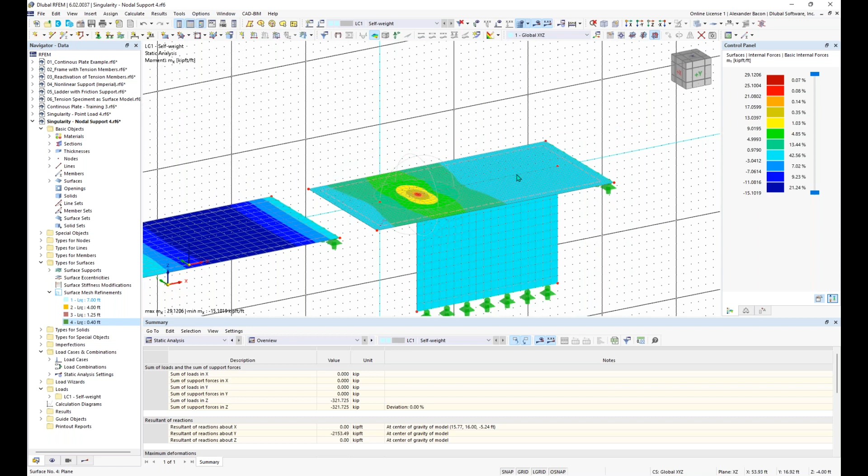Can you just go over how to turn on and off the mesh on this surface? Do you mean turning it on and off graphically? Yes, like the squares that's shown right there if you don't want to see that. So if you want a cleaner view of your model and don't want to see the FE mesh, you can go up to this drop down next to the button and turn off the display of your FE mesh like so.

Okay, yep, that works. And the other one is, is it possible to design weld in RFEM? Yeah, so weld design is possible in RFEM. Let's say these two surfaces here are steel surfaces and you wanted to design the weld connecting these two surfaces.

What you would need to do is go up to the base data of the model, and under add-ons we have a design add-on called stress and strain analysis. What this stress and strain analysis add-on does is it releases stresses into the program so you can view stresses on things like members or elements, giving you the ability to view stresses on members.

If I click OK, you can see now in this add-on, or in the table if I go under the dropdown, the stress strain analysis add-on is available here. Basically what this does is allow you to run a simple stress analysis comparing the design stresses to the limit stresses of something like a surface or a member.